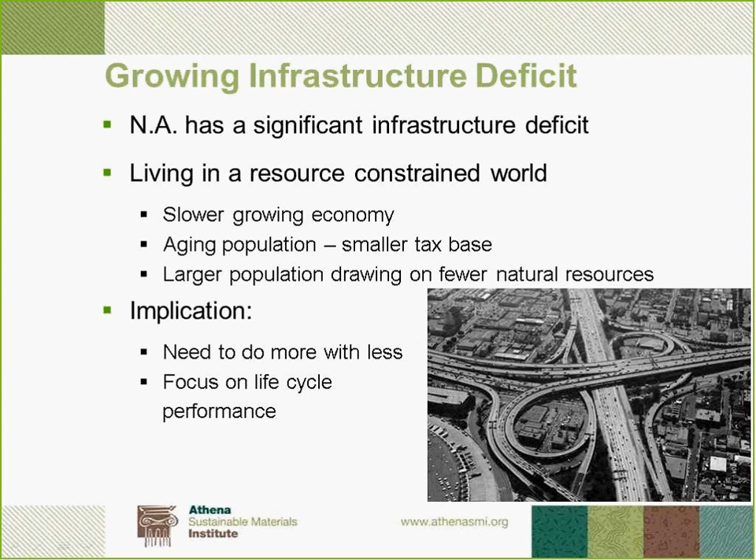Why do you want to apply it to roadway design? North America has a significant infrastructure deficit, even after all of the recent infrastructure stimulus funding. Most infrastructure was built during the 1950s and 70s and has subsequently used up about 79% of its service life. An increasingly resource-constrained world due to a slower-growing economy, an aging population that translates into a smaller net tax base to draw from, and a large population drawing on fewer natural resources. Implications of that are that we need to do more with less, and we need life cycle performance.

Various industries are serious about reducing environmental footprint, but we can't reduce our footprint if we don't know what kinds of impacts we have, how big they are, and what the hot spots are. Many use LCA to reduce footprints of products. Designers use LCA to reduce footprints of their products as well, which would be buildings, highways, etc. If we don't use LCA, we're just guessing what sustainable is and what it isn't.

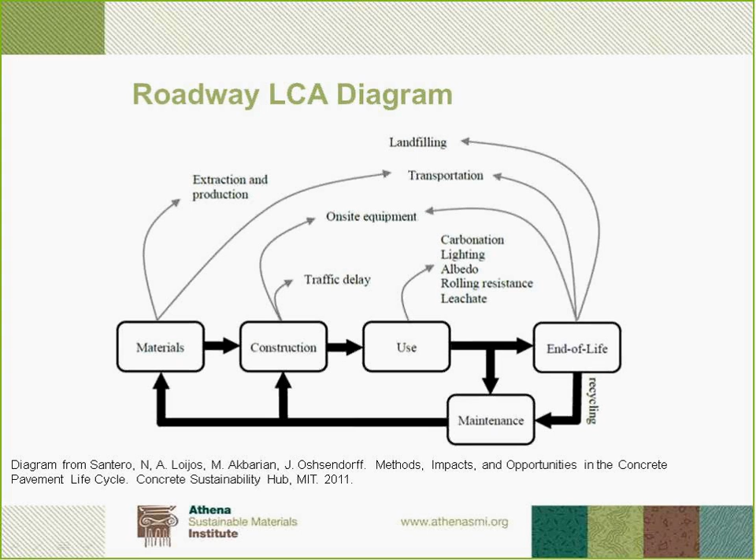We also tend to focus on a single issue or a single life phase. We may therefore be missing a major part of the equation. We may be addressing short-term improvements while incurring long-term damage. We may be fixing the wrong part of the problem. We may be shifting our environmental burdens from one phase to another. Here's an LCA diagram courtesy of our colleagues at MIT. The end-of-life stage does not come into play, as we consider roadways to be permanent pieces of infrastructure that undergo maintenance and rehabilitation into the foreseeable future.

The Impact Estimator for Highways was originally conceived of in 2009 and has been under development ever since. The beta version was released in spring 2011 and was led by Environment Canada and the Cement Association of Canada, with highway engineering expertise from Morrison Hershfield. The commercial version was released in May 2013 and was funded by the Cement Association of Canada.

For highways, the tool could be used to model life cycle effects of roadway cross-sectional design, with LCA results for product manufacturing, roadway construction, use phase, and maintenance life cycle stages. It allows roadway design, but also comes with a library of existing designs that can be used as a launching point for a new design, or can be duplicated and the duplicates modified.

The data library roadway designs cannot directly be altered by the end user. Rather, users can use the database library designs as starting points, as I just mentioned, by either loading and duplicating the sample project version of the library, or bringing in new roadway designs and choosing a library design from the scenario drop-down list, as Grant will show during the demonstration.

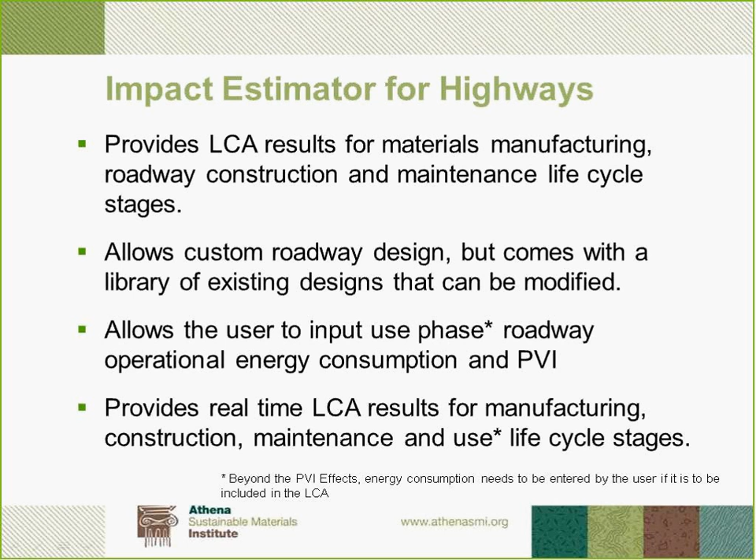It allows users to model use phase roadway operational energy consumption and pavement vehicle interaction effects. Use has two buckets, due to PVI and roadway operational energy consumption. It also has LCA results for manufacturing, construction, maintenance, and use stages. Plus roadway materials in the growing database.

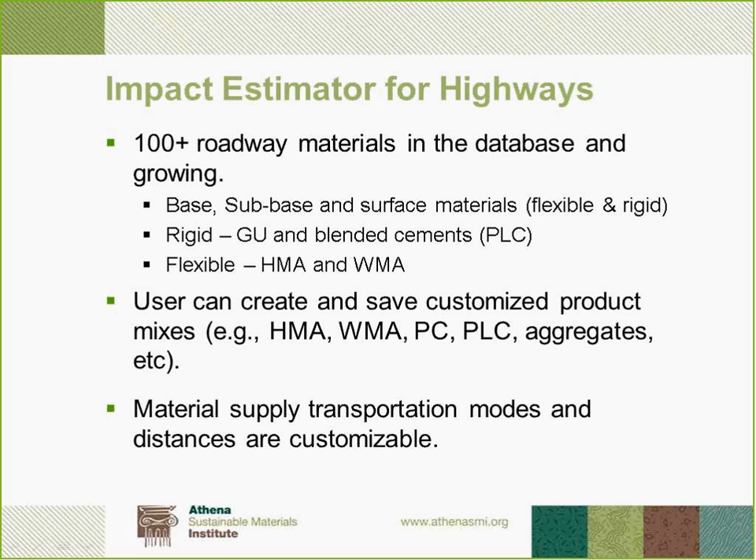Of these, there are 40 component materials for which we have regionalized LCI data, and the rest, like asphalt or cement concretes or admixtures or a variety of custom mixed designs, are built from the component materials. Use and save customized product mixes. Make as many custom products as you want and save them in a user-defined custom product library. Material transportation modes and distances are customizable.

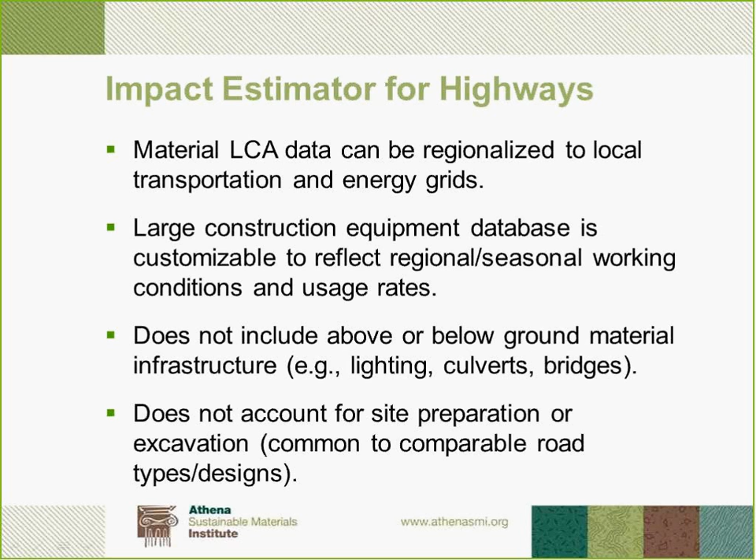Materials can be regionalized to local transportation and energy grids. Large equipment database is customizable to reflect the regional and seasonal working conditions and usage rates. Does not include above or below ground material infrastructure, such as culverts, bridges, etc., and does not include preparation or excavation, which appear to be common to comparable road types and designs.

Transportation data are derived from proprietary Athena databases, as well as U.S. Lifecycle Inventories database and Ecoinvent database. Materials national or industry averages for the extraction, processing, and manufacturing of materials and products. Regional energies and transport distances are then applied to manufacturing process energies and material distances to arrive at regional data profiles.

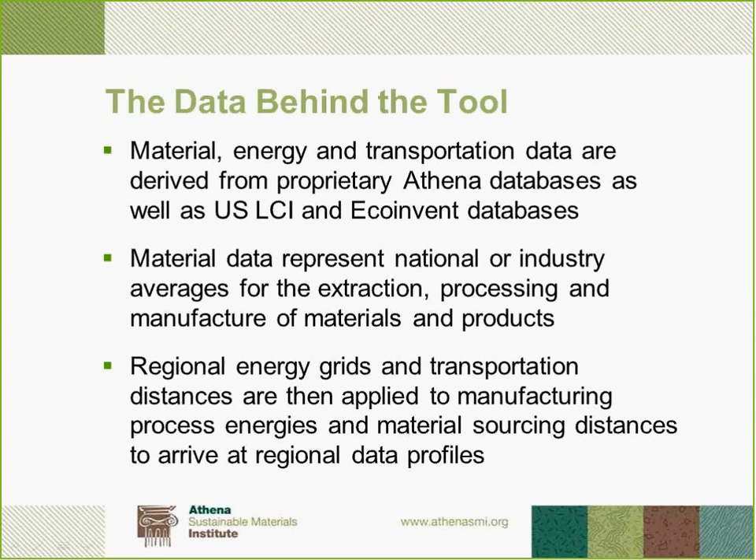The supported indicators are based on the U.S. EPA TRACI 2.0 methodology characterization factors: non-renewable fossil fuel consumption, global warming potential, acidification potential, human health emissions, eutrophication potential, ozone depletion potential, and smog formation potential.

PVI is a function of roadway deflection and surface roughness. Both depend on the makeup of the top layer of pavement on the roadway surface. It demonstrates possible increase in vehicle fuel consumption and related effects associated with the pavement performance over time. It does this by contrasting the pavement's roughness and its deflection over time to a theoretical rigid and smooth roadway, thereby focusing on the effect of the pavement's performance, not the life cycle vehicle effect.

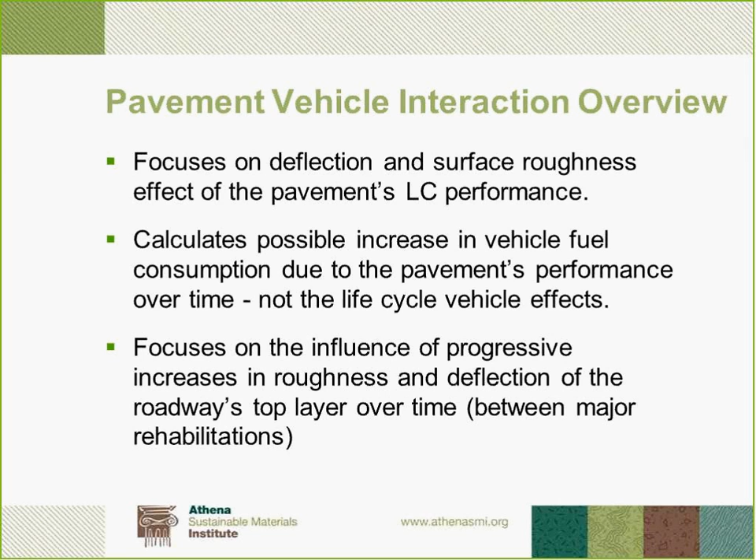The PVI inputs include the following: length, average speed, the start and end years between major rehabilitation events, the International Roughness Index values for each time segment, elastic modulus, thickness, density average values for each time segment, vehicles, traffic, expected ending of the project, and the projected annual growth through the end of the project lifespan.

Possible fuel consumption increase and related effects associated with the pavement performance on a per vehicle basis. Passenger vehicles and trucks, again, are based on federal vehicle classes. For vehicles projected to be using the roadway during the projected lifespan, the default for projected lifespan is 50 years. Dependent on average vehicle fuel consumption and physical characteristics.

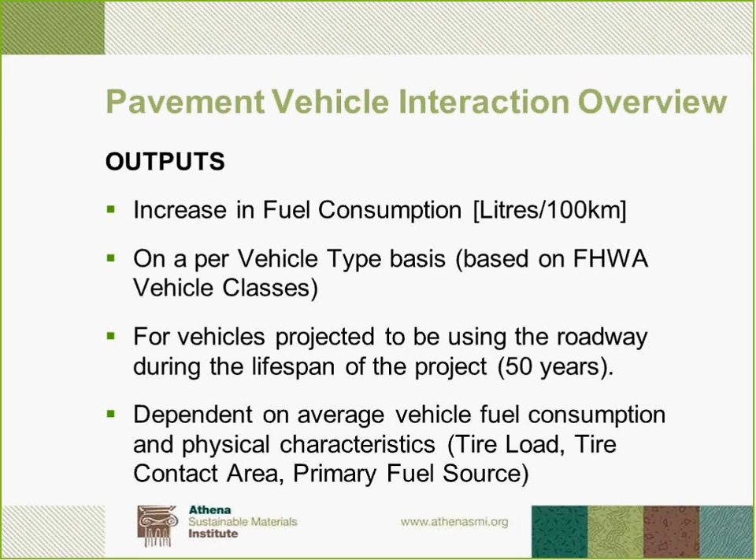Unlike life cycle inventory for materials, plant operation, and construction, which have been studied at length and for which there is considerable literature, it is relatively new and represents a forecast or future state scenario. Scenarios carry with them a degree of uncertainty that needs to be duly considered. Uncertainty would be best handled by using a statistical probability approach to the calculation model and the data, something that this tool does not offer.

Hence, the institute encourages those using the results from this PVI module to always acknowledge this uncertainty when discussing or presenting these results. We recommend that when using this module, users complete a sensitivity analysis and err on the side of reporting conservative results in any public representation of these results.

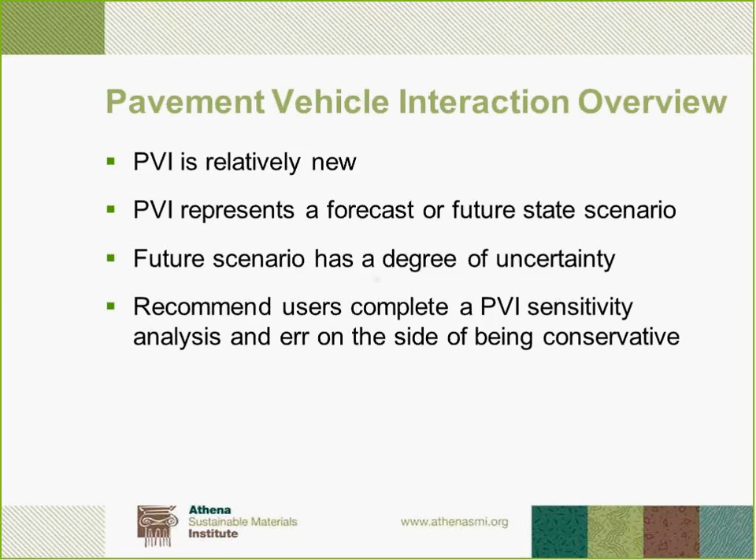This is what the program looks like when you open it up. It's blank at the moment. I have projects already preloaded in here, but when you do open it up, these wouldn't be loaded here. These are two of the sample projects that are available in the tool. There are four of them, all modeled based on an Applied Research Associates report on Ontario municipal roadways. And it's sort of self-described in the title here.

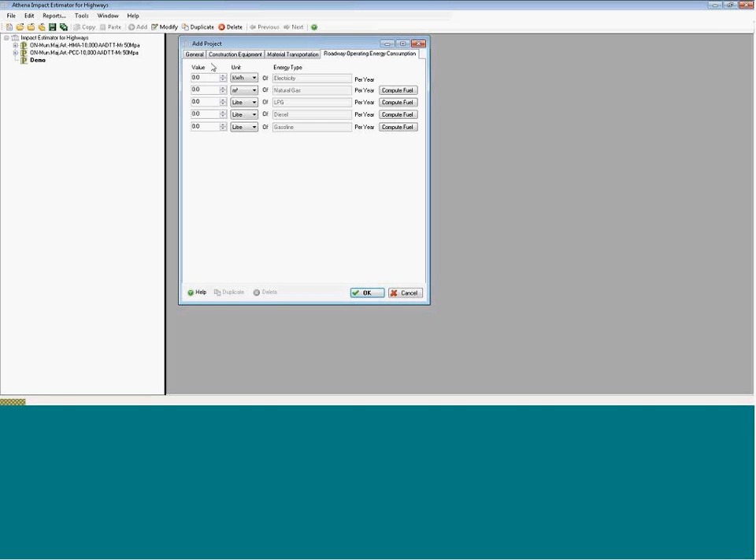The manufacturing stages, that's here. And roadway operating energy consumption, where you can input any total number for these fields if you want. For instance, if you wanted to put in, over the life of the road on an annual basis, X number of kilowatt hours of electricity for the road, burning or using these fuels will be calculated and incorporated into the results. I'll probably go into construction and material transportation a little bit, maybe just show a couple of the details.

We've created a project, we've done a location, and you see here I've got a new project added. All that's left is to create a roadway. So I just right click on demo here, a little box pops up, and you see down here we have Add Roadways. Click on that, and it will pop up. This is our design box. We can give it a name, we can call it whatever we want. I'm going to make this, let's say, an HMA.

You can create your own scenarios and save them, but we also have ones that are preloaded, 48 that are available as full samples. Choose one of these from this list if you want to quickly start a project and then modify it. But I'm going to start from scratch here, and then we have to fill out a bunch of these boxes. So we have initial cost. I'm going to do lane length at 1, 2 lanes, 1 pavement lift, and I'm going to say there's 1 granular layer here.

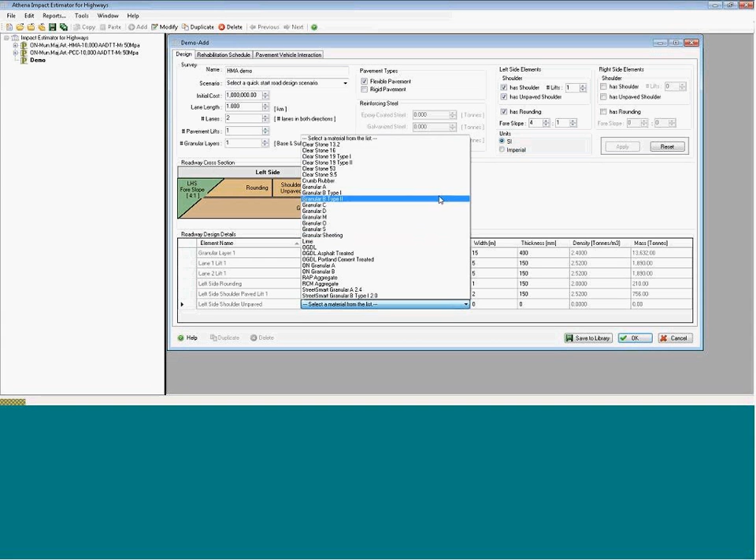And shoulders and unpaved shoulders. Asphalt, right, let's say 150 thick, and shoulder with granular B, 2 meters wide, and 150. So on these thicknesses, for instance, if you had these two lifts with a different thickness, it says that should happen. It's to make sure they're correct, but it is possible to miss something there.

Okay, so we've designed our roadway, basically. These are our lanes and lifts, and okay here and save that. And there's an error message here to do with the PVI effects. I'm going to come back here, so I'm just going to ignore that for a second. And so the roadway, we call it HMA demo. In case you have to get it back in. And the same thing comes up here, and you can edit this any way you want later on.

The next thing to do is a rehab schedule: add steps to the rehab schedule. When you click on the tab at the top here, rehab schedule, it's blank at the moment, and I'm going to click add, and this pops up. You fill out these things again. So we're talking HMA road, so let's say after 15 years, mill and resurface rehab steps. So after initial construction, we expect it to last 15 years, and I'm going to do an asphalt partial depth reclamation.

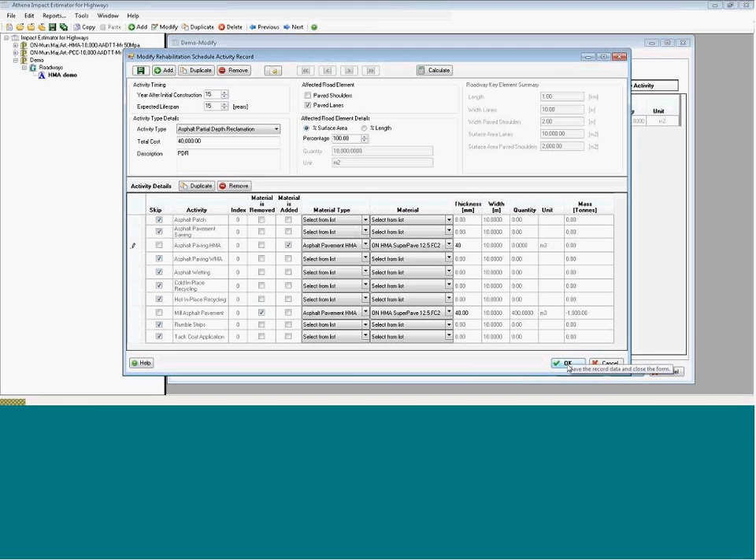If I click OK here, it ends the table. If we need to edit, we can go over to the left-hand side, and that pops up the box there. That's how we do it.

A route over 50 years is a whole bunch of rehab steps, and I'm going to show you the complete files in a minute. But once you finish your rehab, you go to your PVI schedule, and this MIT study or model that we've incorporated here. It requires information from you that you already knew about.

This ignore PVI effects option, I'm going to unclick that because that was the error message I got before. It was telling me I had not completed this section. If you don't complete that section, you can click that button and leave it on, but we're going to do it here.

So we go to the PVI section, and we're going to say the first basic input needs to be entered for every major rehab, or rehab when you change the surface of the road.

Put in a mill and repave step at 15 years. So for the first 15 years, fault, let's say it's a top elastic modulus of 10K. It was 150 as the top thickness, but that's probably an unrealistic number. Let's say it was 40 as a top layer, and we milled 40 and replaced the 40.

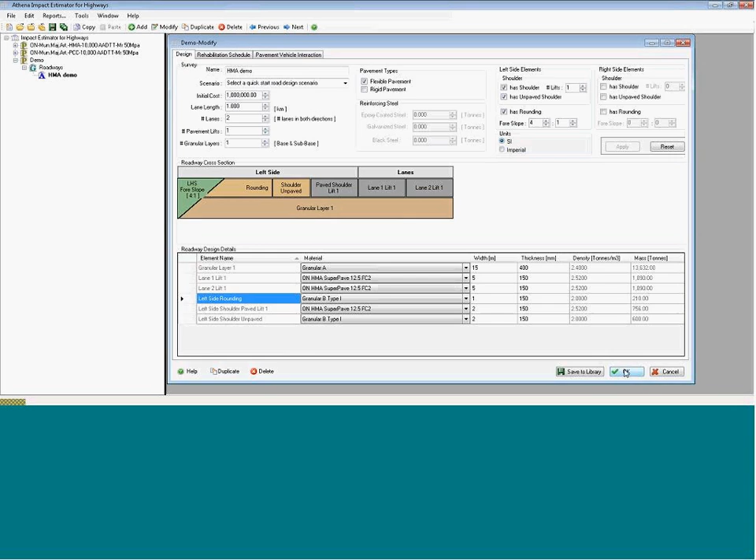And we've completed our PVI input, and like every major rehab, there's going to have to be a row up here for the changing IRI scenarios. So on the PVI, we've completed our PVI, we've completed our rehab, and we've completed our design. I click OK, and we have our road, and basically we're ready to look at some results.

I'm going to click Save on here for now, and then I get this demonstration. I'll go up to one of the included sample files, which is Ontario Arterial Road, HMA, with 10,000 daily truck traffic and a subgrade modulus of 50 MPa. I'm going to click Roadway.

This roadway design did not have any shoulders or roundings on them. So you see here, we just have a simple 4 lanes with 2 lifts and 1 granular layer. Pardon, granular layers.

These things are populated. The whole width is a 16-meter road. We've got 2 outside lanes at 4.25, 2 inside lanes at 3.75. We've got 2 granular layers at 500 and 150 millimeters thick, and we've got 2 lifts of pavement at 140 and 40 millimeters thick.

So it's the same thing as I just showed you, but here I go to the schedule, and there I can schedule according to that report we talked about. So at year 8, we've got spot repairs and rout and seal. At year 13, spot repair and rout and seal. At 18, we have a full depth repair with a 50 millimeter mill and surfacing.

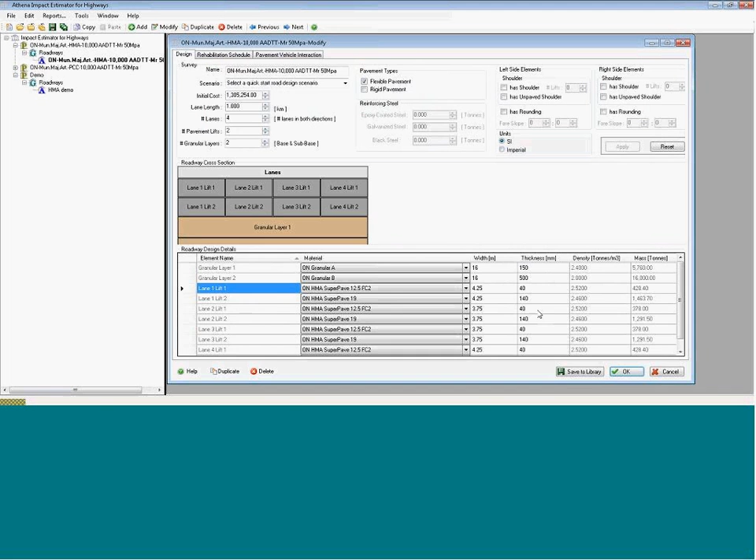This is the IRI switched at every resurfacing. So for instance, we've got surfacing at 25 and 40. We're not doing surface here at 25 and 40, and texturization at 25.

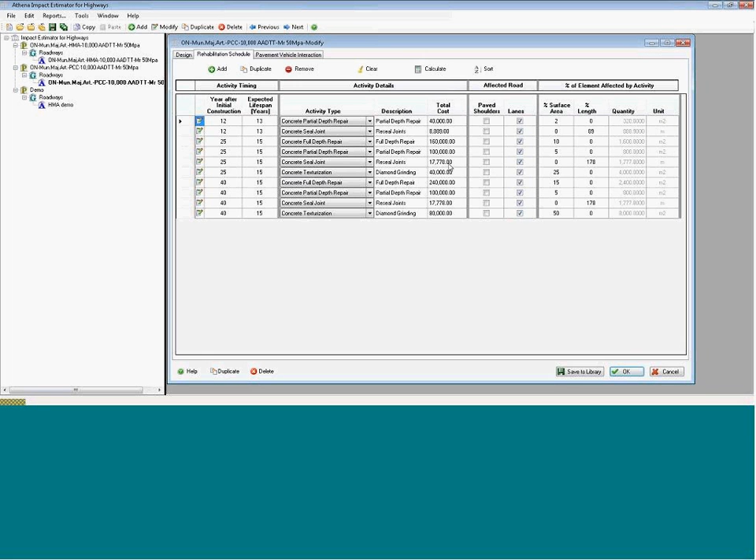And we're saying it's taking off 5 millimeters each time you do that. So with a 200 millimeter layer, this phase we had a 195 millimeter top layer, and then the third phase we have a 190 millimeter top layer.

So this is a complete road design of the same functional road. It's a 4-lane, 1 kilometer road of the same, and we look at some results. I'm going to go up to the top bar, choose and click the reports box, and this is what comes up.

We've got project at the top here. So let's go to HMA again, and the thing we look at is the bill of materials. So with steps and all those design questions, this comes up with how much of all the materials that we're using in the 50 years of that roadway cycle.

Coats, granular A, granular B are different super paves and asphalt sealants. If we look at the PCC bill of materials: granular, our concrete, our reinforced steel, and our crack sealant.

Then there's our life cycle effects, so that's what we call summary measures in here. So I'm clicking summary measures and table here, and click show reports.

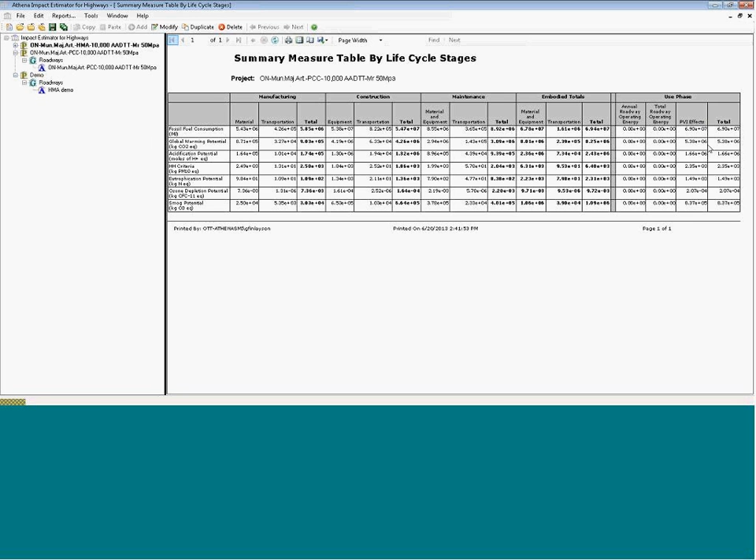And then we have the PVI effects here. Total is our totals here plus our use totals here, and that gives us a total column. Let me go up to a bigger size here just to show it.

TRACI results by different life cycle stages, so you can see whatever results you're looking for. If you're only looking for the initial construction, you're looking at manufacturing and construction phases. You'd only be interested in these totals here, and that's why the results are separated into these phases, in case you use something other than just the total.

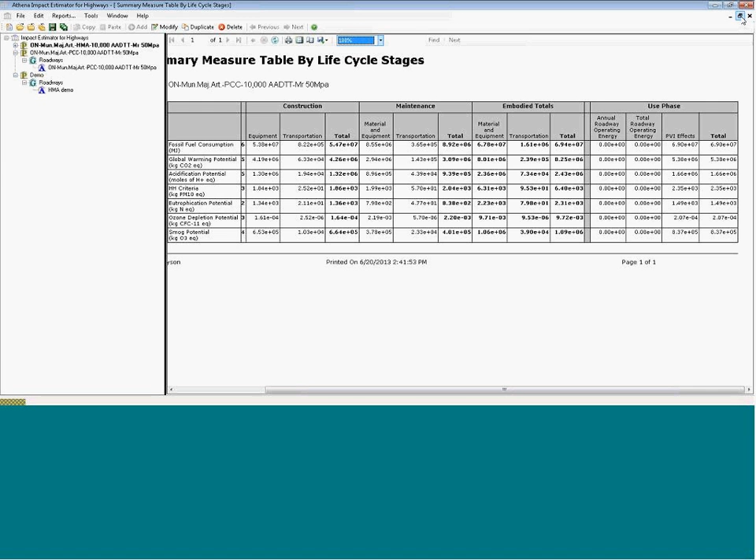The other way to look at some results - for any serious analysis of these roads, you're doing this with these tables. I would suggest you go up here, export the table to Excel, and do your comparisons there. But we do produce some graphs.

We can produce some graphs of these results. We can compare two projects. So up here under comparison graphs in the reports box, I choose my HMA and PCC roads here, and I can choose all of these. I'm just going to choose a couple: fossil fuel and global warming potential, and show these graphs.

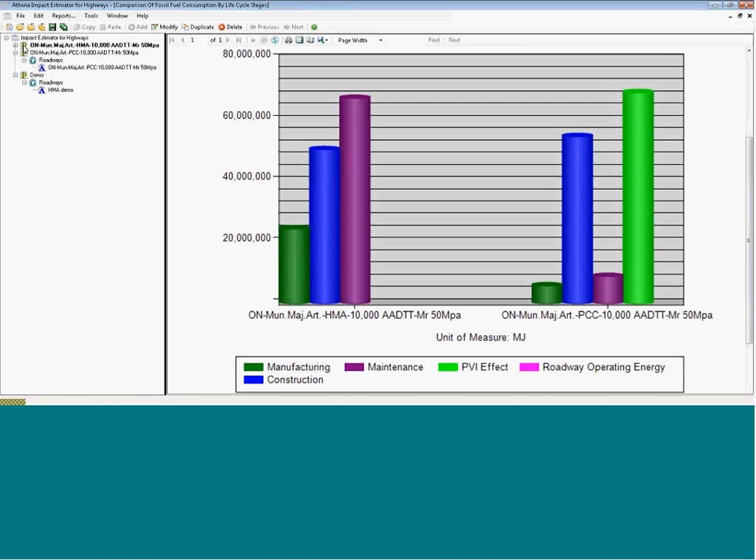And here we have a graph, and our results divided by life cycle stages. This is the HMA road, and this is the PCC road. And look here - I think I accidentally ignored the PVI effects.

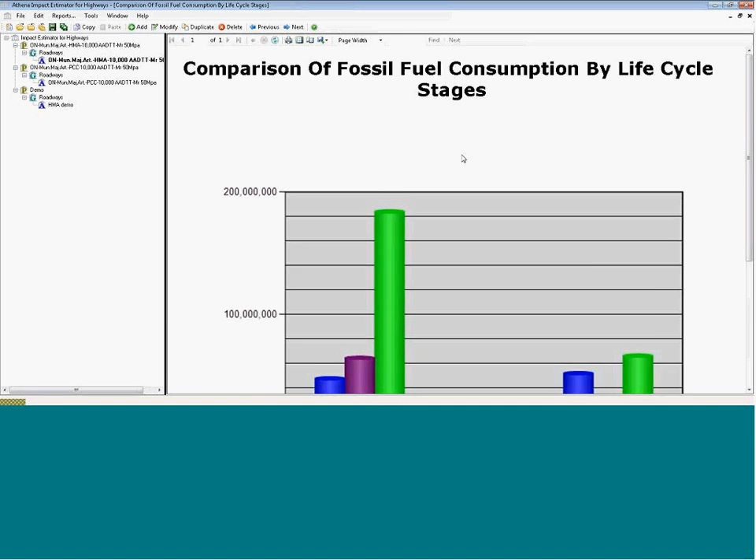Let me go back and unclick 'Ignore PVI effects'. There, come on, there we go. So now we have the PVI effect from the HMA road, we have the PVI effect from the PCC road, and the same for all the others.

Manufacturing versus manufacturing, maintenance versus maintenance, versus the construction in blue. Same thing for warming, and there's the same idea.

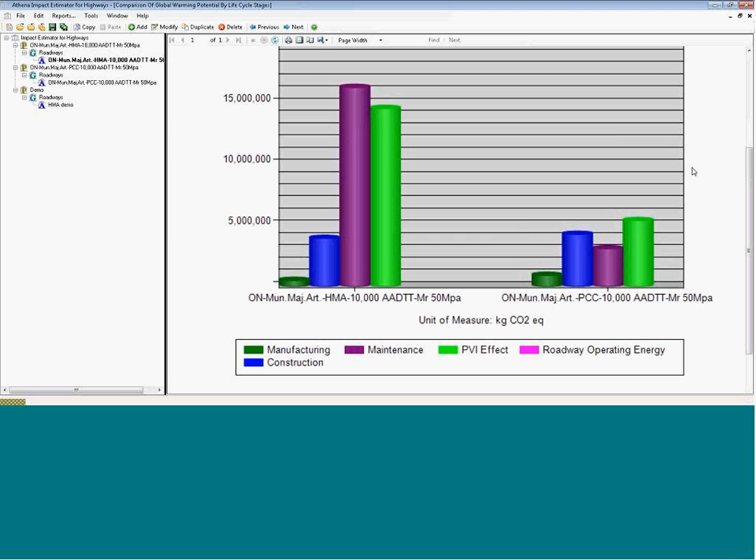We have a side comparison of these two projects. Now, if you want numbers for these, it's not very accurate - it's more an idea of the relative effects of two different roads. Sorry, let's get rid of that little box there.

Those are the results you're looking for, and what you're going to be doing is exporting it to Excel and comparing numbers probably in Excel if you're writing a report or something like that.

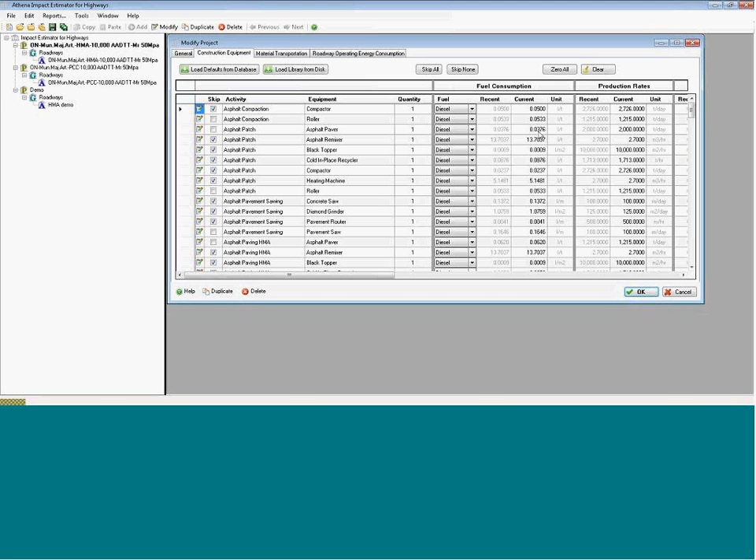If I click zero there and clicked OK, I should have just hit carriage return. Changing that to 2,000 changed the value from whatever the previous number was—I can't remember it now. Anyways, that number changed, so the idea is you can customize this equipment.

There's another tab at the top of this form for the transfer of raw materials to your plant. For instance, down here with bitumen material, the default distance for transporting bitumen is 300 kilometers by road, 0 kilometers by rail, and 0 kilometers by barge—basically the distance from Sarnia to Toronto.

If you're modeling in some far off place and know you've got a long distance to travel, or if you're doing it in Sarnia and the distance is different, you can change the number here to whatever you want. So let's change it to 500 kilometers, and our transport data will change because we've transported our bitumen a further distance. The point is it's customizable to your own situation.

I'll modify the project and click OK. We've changed it in there. The other thing to look at up here is Tools and Product Library.

This is an important one, and this is where you can make your own custom products. So basically if you have a concrete mix design you want to specify, in our database library we have these things here—for instance, a bunch of concretes with different, at 30 MPa, different fly ash contents and Portland limestone cement. So if I choose one of them, here's the breakdown of that database product.